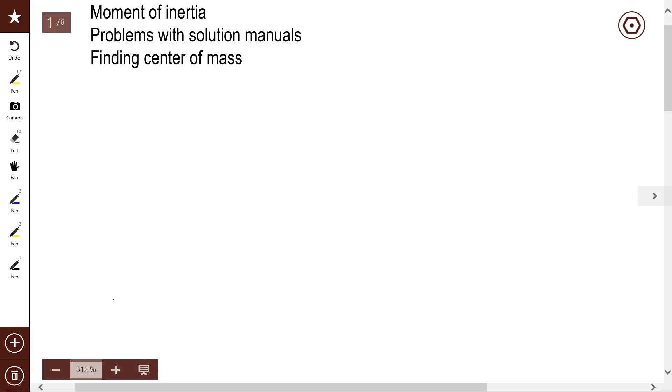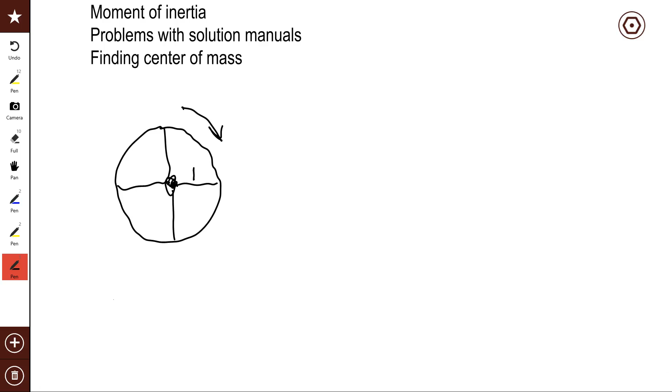If I were to take a ring of mass - let's say that's a piece of metal - and I bend it around, and I put some spokes in here, just so it'll stand up, and put a hub on there, and I spin it. This is a radius of, I don't know, 1 foot, 1 inch, whatever, and it's 10 pounds, let's say. Can you imagine that? Okay.

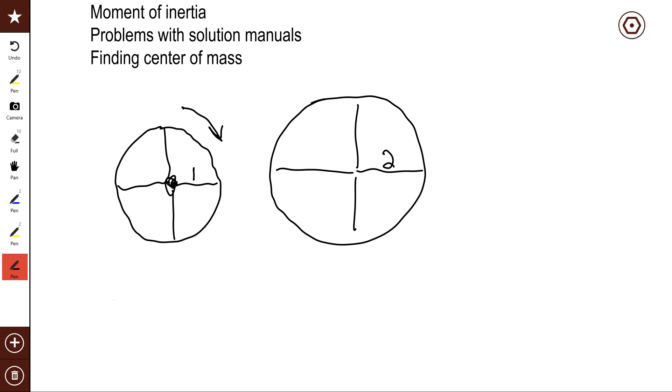And then what I do is I take another 10-pound ring, and I do the same thing with it, but this time I have a radius of 2. Does it have a hub? It has a hub just like the other one - I'm not trying to fool you, but good point. So it's got a hub, I'm doing the same thing to it. All right, and here's what I want to know - if you have your clickers, we'll see what you think.

Number 1 is the left guy, and number 2, or A or B, is the right-hand guy. What I want to know is which one of these would be harder to speed up in spinning. They're sitting at rest, and you're going to come up there with your hand and start turning them. Which one would be harder to get started, the little guy here or the big guy over there? It's the same weight, the same weight, just at a different distance.

Okay, so let's see what y'all are saying, if I can figure it out. Okay, so 65% are saying B. I was hoping for a bigger percentage, right?

Here's what's happening: the lighter, the shorter in this way that the mass is, the easier it is to turn. So if you got that one wrong, maybe I said it wrong, right? Maybe I've deceived you somehow. But if you're thinking 'wait a minute, that doesn't make any sense,' come see me after class, because I want to make sure you got the right idea.

Which one is easier? Well, you got a 10-pound ring, this big around, and I'm going to sit in the center and start turning it, making it go faster and faster. Then I have a 10-pound ring, but it's twice as big. Which one would be harder to speed up? The one that's twice as big. So if you got it wrong, maybe I just said it wrong. But what I want you to have is a feel for the fact that in order to get these things to start spinning, the distance that the mass is out makes a big difference. Make sense? You probably experienced it, right? The bigger the tire, the harder it is to get the thing moving.

The other thing that will give you a large inertia—inertia is it doesn't want to change, right—so what gives you a large moment of inertia is a large radius, which I just asked you about. The other thing is a large mass. So let's say you've got your arms out at a certain distance. If I pick up some weights out here and then try to turn like this, it's harder for my body to turn because of the extra weight that's out there at my hands. That make sense? So you have a feel for what moment of inertia is. Large moment of inertia means you got either big mass or mass at a large distance, one or both, right? You get the idea? So if you want lower inertia to turning, you want to pull the masses in. Does that make sense? Okay.

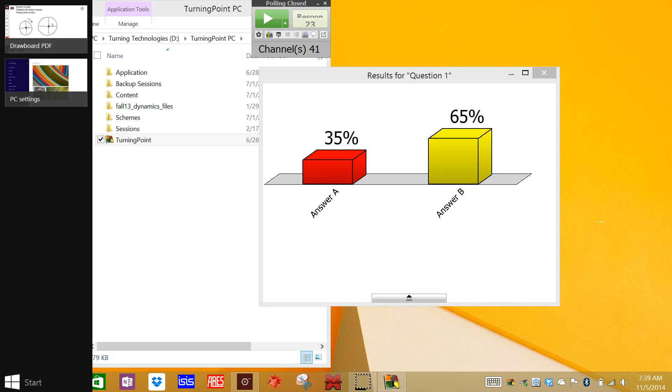The other thing that you need to know about moment of inertia that people are going to expect you to understand is something called the parallel axis theorem. If you have a body, any body, it's going to have a center of mass. Are you familiar with what the center of mass is? It's a balance point. Do you know how to calculate the balance point?

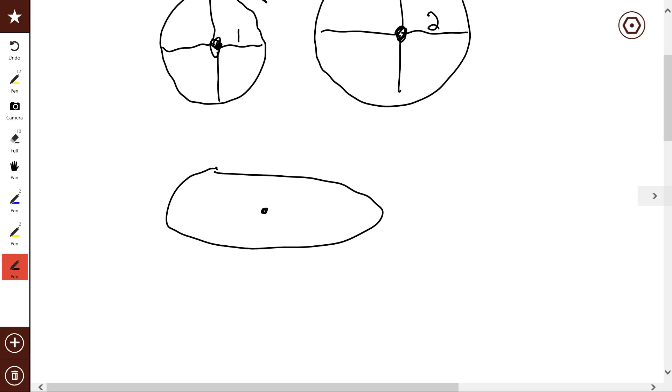It's the centroid. Well, it's close to the centroid, but if you take the centroid and multiply by density, then you get the center of mass. For example, if this is an area, the centroid would be the center of the area. So if you cut it out of cardboard and found the balance point of the cardboard, that'd be the centroid. If, on the other hand, this part over here was all gold, and over here it was all aluminum, it would have a different balance point, wouldn't it?

Center of mass is different than centroid, but they're very similar calculations. Got it? You know what the center of mass is. You could do it if you had to, I'm not going to put it on a quiz, but you could do it. The way you really do it in the real world is you draw it up in NX and click a button and it gives it to you. So I'm not going to beat you with it. But everything has a center of mass.

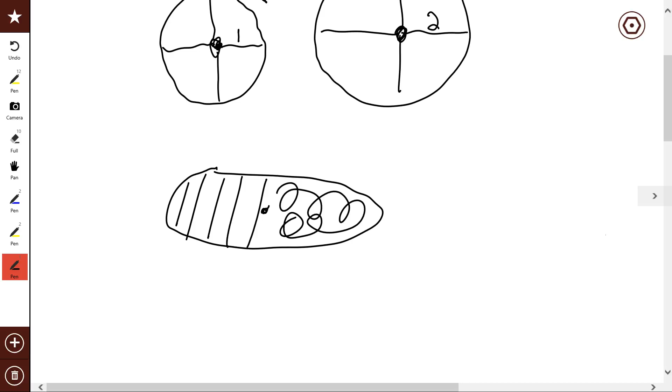Now, if you want the moment of inertia of something, say you have the moment of inertia about this point, about the center of mass, and you want the moment of inertia around some other point over here, then the moment of inertia around this other point is equal to the moment of inertia through the center of mass plus the mass times the distance squared between the two. Not on a quiz, but you better have that in your mind when you go to work, because somebody's going to say something and you'll say something stupid and lose your job because they'll say, what an idiot, doesn't even know how to take 2 plus 2. It's called the parallel axis theorem.

Usually they'll say, well, you can use the parallel axis theorem and shift it over, and you need to say, yeah, I understand, I know how to do it. Well, what you're going to do is you're going to do it on NX. That's the way you'll actually do it. But you need to know about the parallel axis theorem. People will ask you about that or say something about it, and you need to sound intelligent. Got it? You will use moments of inertia.

Especially in Chapter 17, you'll use them on the test. I will tell you the formulas for them. Y'all had Calculus 2, I'm sure, or are doing it now. In Calculus 2, they have you integrate to get the center of mass, or centroid, or whatever it is, and they have you integrate to get the moments of inertia. It's agonizing, isn't it? That stuff is the stuff I had to do. Man, we don't do that anymore. We just don't. So why are you taking Cal 2?

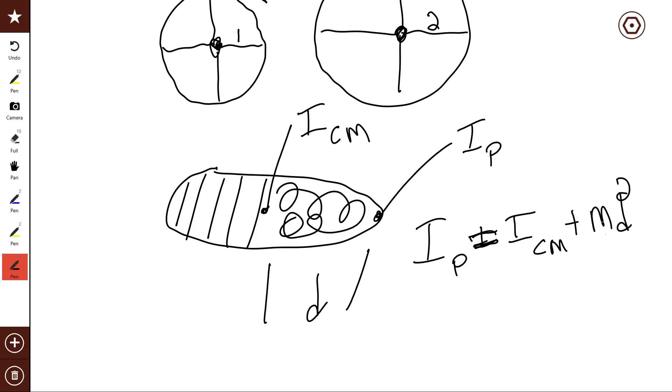Here's another issue, and I could care less if you use the solution manual. I really don't care. You're not supposed to, but I don't care. I'm not going to rat you out. I'm not going to come get you. I don't care, it's a learning tool. Use it. Here's the problem you're going to have.

In Chapter 17, the author does problems differently than what I do. I've done it his way, I've done it in classrooms when the professor made me do it, and I've done it in real life. I'm telling you, it does not work. Well, it works, it works, but it's confusing for almost all problems. Very simple little problems that I would make up in a book that I publish, you can use the technique the author's got.

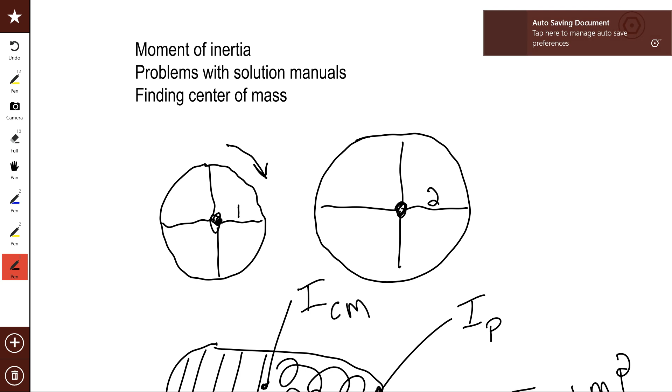It doesn't work for everything. Well, it's confusing—see how confused I am already? It's confusing to use that technique. What I'm going to do is like I've always done: I'm going to say there's one way to do it. Here's the one way you do it. It works every single time.

You can do what you want. So when you're doing your homework, if you got a copy of the solution manual and you open it up and say, man, this stuff doesn't look like anything Everett's doing, you're right, because I don't do it that way. If you want to do it that way on the test, that's fine, I'll grade it that way. But the odds are, and I've seen this historically because I've taught this class a long time, you're going to mess it up. You're going to try to use it, not listen to what I'm doing, do it your way, and make a mistake. And I'm going to hammer you, just like I'll hammer you if you make a mistake doing my way. It's up to you. So I'm just warning you ahead of time that the solution manual is not going to do it my way.

And I suggest you do it my way, but it's up to you. All right, so you know how to find center of mass. You have an intuition about moments of inertia, and I've warned you about the solution manual. How about we just do some problems?

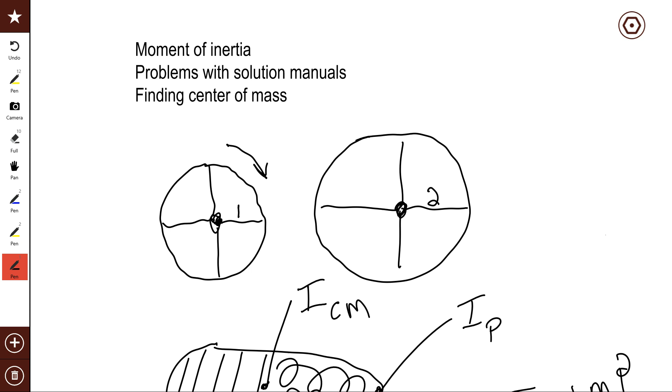Is that good? Okay. All right, so basically the difference in this particular, well, let me just ask you, let's read this problem and you tell me what the difference is. What's the difference between 16 and 17, okay?

So read this. The cart is given a constant acceleration of 6. Determine the force developed in the rod AC and the horizontal and vertical components at the pin B. The crate has a weight of 150 with a center of gravity at G, secured to the platform so it doesn't slide. Neglect the platform's weight. Okay, here's the picture.

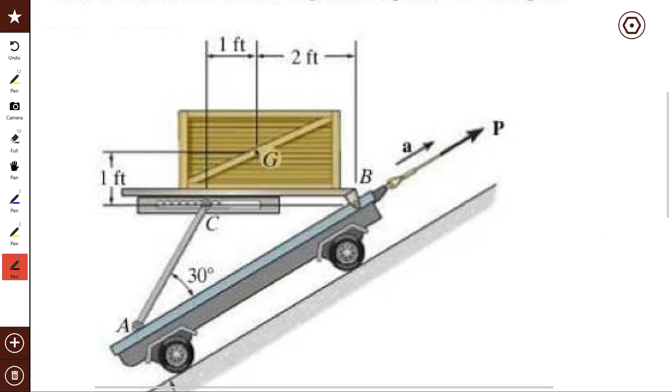Why isn't this a Chapter 16 problem? It wants a force, right? Remember chapter 12 and the difference between 12 and 13?

You count the degree of freedom. All right, so how many, by the way, how many degree of freedom is it? One, because the cart can go up the hill. Okay, stop the cart from going up the hill, nothing else changes.

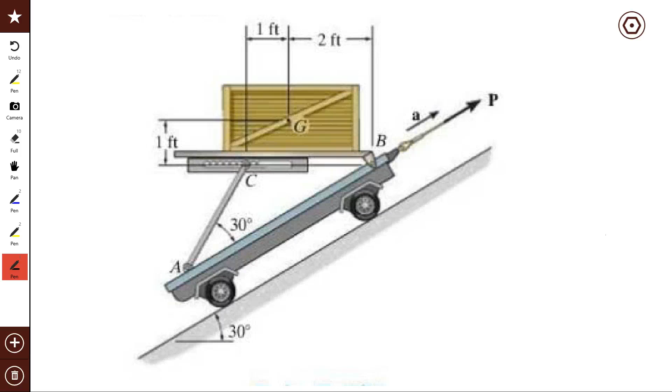Okay, what does 1 degree of freedom mean? It means if you give me one double dot, I can find all double dots. Did they give me a double dot? Sure, they told me the A was 6. So I go, hot dog, man, I can get all double dots. That's not what they want.

Right? So what do you do when you're faced with a situation like this? Because you're going to have to select between chapter 16 and 17 on the next test, right? Do I draw a free body? If you draw a free body for chapter 16, you're not getting any credit. It's not like I'm going to dock you, but you're wasting your time. It's not going to take you anywhere, and there's no credit there because you're doing the wrong thing, right?

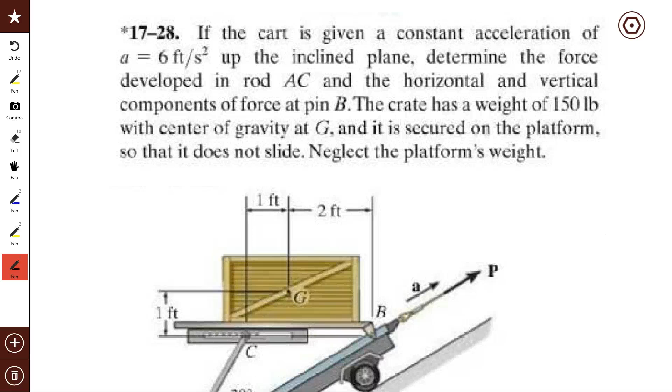So you need to be able to select them. So this one, pretty obvious, okay? All right. So how do you do a chapter 17 problem?

Free body diagram. Okay. So how many objects are there here? What are they? The crate and this body right here, right? Okay. So at most you're going to have 2 free body diagrams, at most, right?

Let's see. Shall we do it? Sure. Okay. Which one do you want to take the free body of first? The crate, and I hear the crate, I hear the cart. Here's what I want to do.

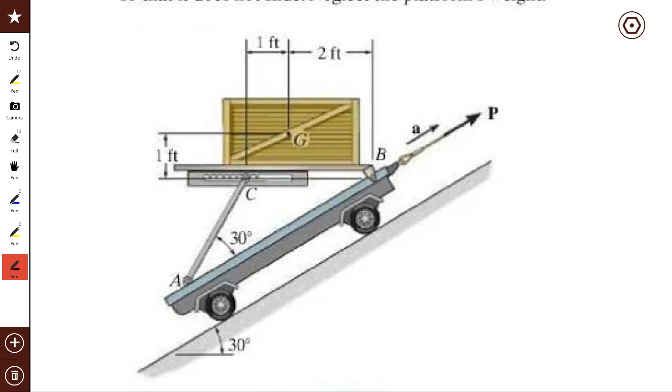When you look at what they want, the force at pin B, that's this guy right here, and they want the force in rod AC. See where that is right there? So here's what I'm going to do.

I'm going to go in there and I'm going to take a body like this. Okay, everything inside this circle is going to be inside my system. And I'm cutting through pin B. I'm going to try that one. Why do you think I'm going to do that?

Why did I cut it here at pin B? Because what I want is I want the forces at B to be between 2 things. They're always between 2 things. I want it to be between something that's inside and something that's outside. Otherwise, it won't come up in the free body. Make sense?

Really? Right? Okay, why am I cutting this? Because you want that one as well, right? You want the force in this guy. Now, why do I not cut it at the pin? Why can I cut it here?

For example, this would be dumb. See if I can get a different color. This would be dumb to come down here and cut like this. Why would that be dumb? First of all, it misses B.

Tell me about the forces when you start cutting into a big piece of chunky metal right there. You know what they are? Man, you got shear forces. Yeah, it sounds like you've been in Chess's class. You got shear forces, you've got tensions, you've got moments. Man, you got a lot of stuff in there. Do you know what they are?

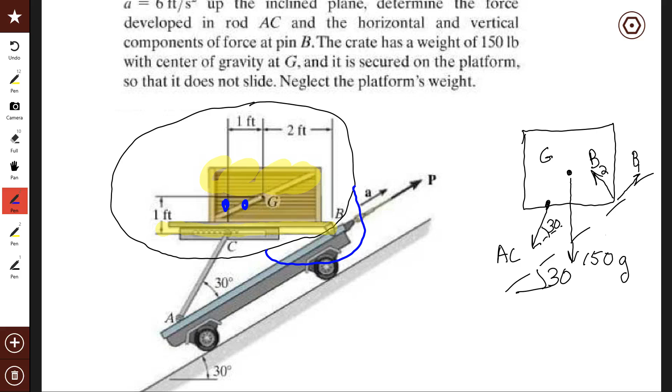It says it's 150 pounds. Is that weight or is that mass? Weight. So should I be taking 150 times G for the gravity? Oh, man.

There we go. What about those B forces? You like those the way they are? Why not? Why do you want X and Y?

Okay, I like that too, because what you're going to have to do, we're going to sum moments. You need to find the moment arm, the perpendicular distance. It's not impossible to find it, right? But do you want to do it? I sure as heck don't, right? So probably not smart, so let's change it, okay? And what would be convenient? Horizontal, vertical, that sounds good. Is that okay with you?

All right, so here's what we'll do then. I'll get rid of those guys. Haven't quite figured out. Oh, man. Too much. Oh golly. One of these days, man. There we go. Okay, I'm gonna put them in some other color, just because I don't want to try and erase them again. Okay, so here's a B. Whoops, pick it up. Oh man. Well, theoretically it works, huh?

Okay, all right, so I'm going to draw a B1 here, BX we'll call it, and then a BY. Okay, is that good? You like that one better? Okay, here's what we're going to do.

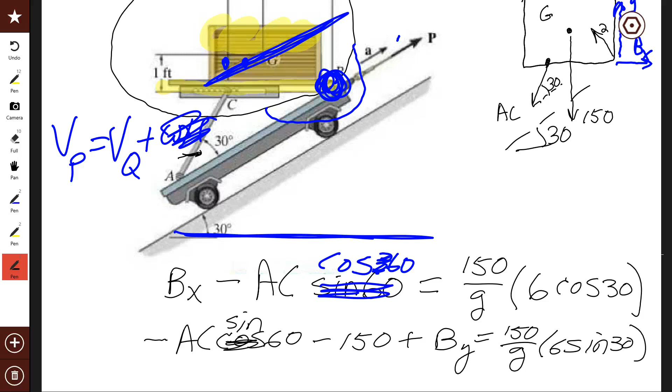You remember how to sum moments? It's R cross F, or the force times the perpendicular distance. Let me show you how I would do it up here.

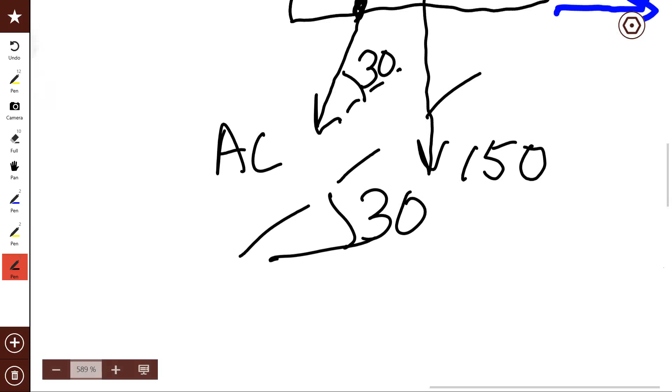Here's what I do: I'm going to find the moment of bx. I come in here and draw a line along bx. Then I find the center of mass, here it is, right there. And I want the distance between that point and the line I just drew.

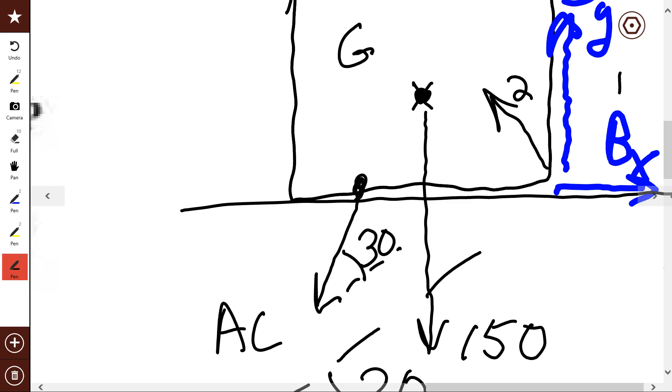What's the distance? Is it this distance here? That distance right there - that's the perpendicular distance from the force. A lot of times students say, oh, there's the force, and they find the distance from there to there. See that? That's not right - is that perpendicular? No, it is not. So what you do is extend the line as long as you need it to be, and then it becomes pretty clear what the perpendicular distance is. That distance is 1, I think, in the diagram.

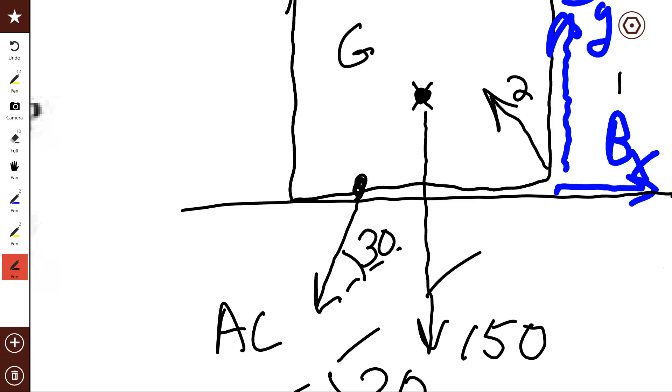So what's the moment of bx? It's bx times 1. Is it clockwise or counterclockwise? Counterclockwise. Why do we choose it as positive? That's the right-hand rule - i is that way, j is up, right-hand rule, positive rotation is out. So that's counterclockwise, that's the moment.

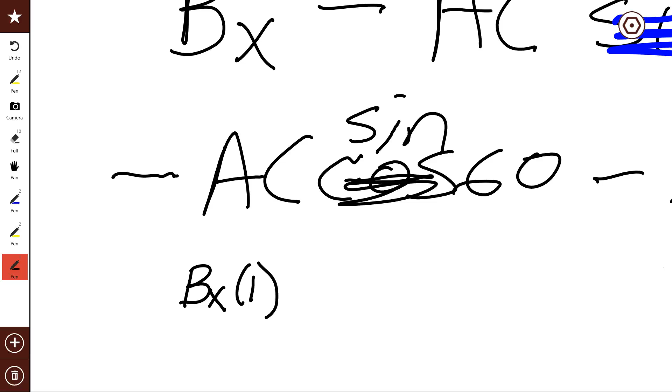Can you all see the direction, or should I talk about it? Think of it as being pinned down - hold it down gently with your fingers at G. If you pulled on bx, which way would it turn? It would turn that way, wouldn't it? So it's counterclockwise, that's going to be a plus.

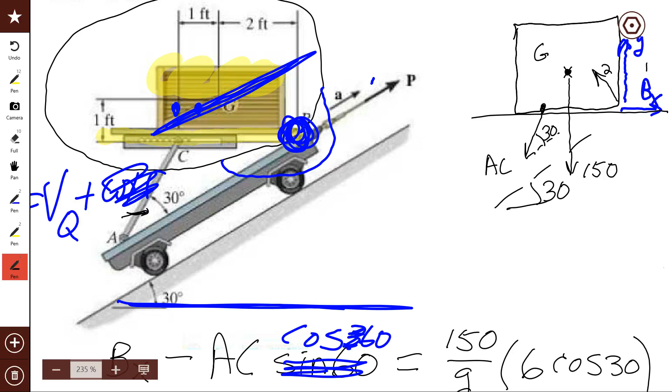Okay, get the by. What's the perpendicular distance for by? It's not the same. So it would be by times 2. What's the direction, plus or minus?

Okay, how about that AC? What are we going to do with it? What I would do is break it down into two pieces, a vertical and a horizontal, and then do that one. If you're really good at geometry, you can draw a line from here and find the perpendicular distance directly - I'm not good at geometry, so I'm going to break it into two pieces.

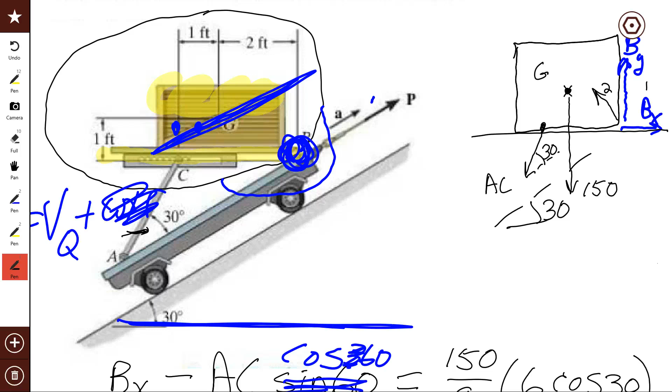So the vertical piece is AC cosine 60, right? Oh, I'm sorry, that's the horizontal - did it again, didn't I? Okay, so AC sine of 60, that's the vertical piece.

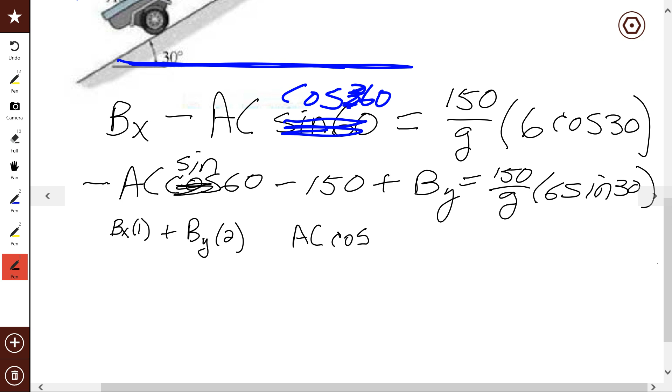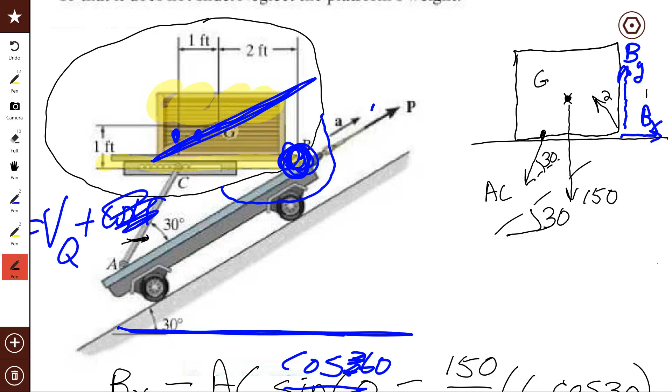Let's find the moment arm of that vertical piece. Here's the force right there - looks like 1 to me. And is it positive or negative? Positive? Okay, I agree.

Dadgummit. Okay. It's Monday, right?

Okay, the moment arm is still 1. What direction is it?

We're doing AC, the horizontal, right? According to my diagram, which way is the horizontal AC? Well, you have your diagram the wrong way. I wanted it for compression. No, this is tension, I drew it in tension. Isn't it that way? Yes. Okay, if it's that way, hold it down gently there and pull here.

Which way does it go? Clockwise, negative direction. Yeah or no, argue with me. I'm not saying I'm always right. Apparently today I'm always wrong. On mine I just switched to it. Well, because you have yours in compression, you're going to have just the opposite of what I have, and your number will be opposite mine. So if I get a negative, you'll get a positive, because it is in compression, right?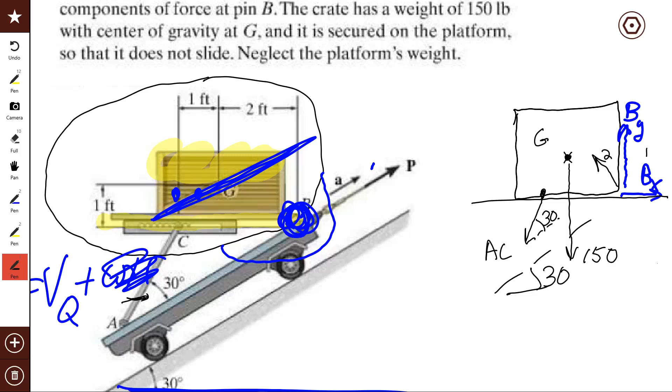All right, so the moment arm is still 1, but I screwed up on this guy. This should be a negative. Okay, now the vertical, right? Now we'll get the vertical. That'll be AC sine of 60, and the moment arm there is 1.

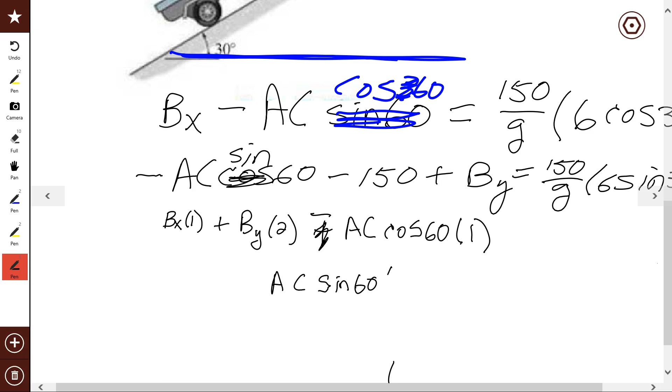In what direction? Anybody else creating moments? I got the BX, I got the BY, I got the AC. What about that 150? Ah, good.

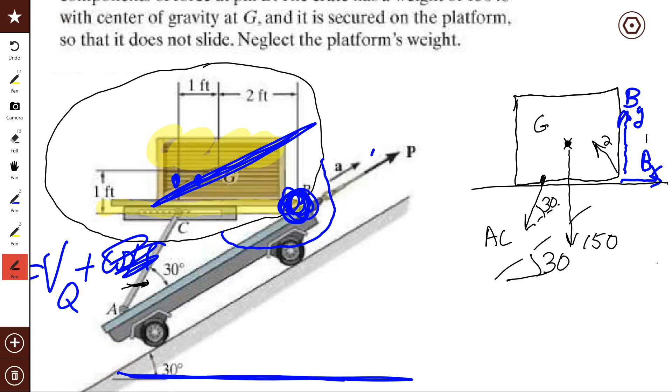Okay, so what is this equal to? Well, according to Newton, brilliant man that he was, this is equal to the moment of inertia of what? Of the crate, of the thing in the free body. Whatever you chose in the free body, if you put 2 masses in the free body, it's the I of both of them. If you have 1 mass in the free body, it's the I, the moment of inertia of that body. Got it? Whatever's in the free body. I, around what point? The same point you're summing moments around. So if you sum moments around B, the wrong thing to do, but if you did, it would be I around B. Where did we sum them? Center of mass. So this would be moment of inertia, usually called I around the center of mass, which was point G.

Times the angular acceleration of the body. So it's like MA, it's I, that's your mass, and your alpha is your acceleration. So it's I times alpha. Why did I put it in as a positive alpha? What am I assuming about alpha? Which way is positive? I'm assuming it's accelerating counterclockwise. Do you know what the alpha is?

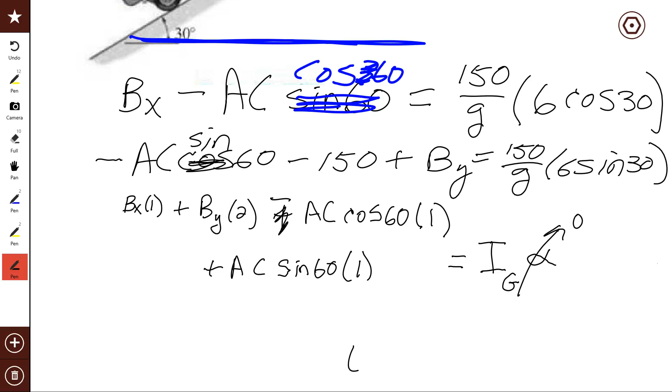Now, how many unknowns do you have? Bx, By, AC. How many equations you got? Problem solved. Can you solve 3 equations for 3 unknowns? Yes, you can. Do you want me to spend time doing it? No. Okay, let's go to the next one. But you can do it, right? Are you saying no? Okay.

How did that one get in there? Oh, it's the second one. Yeah, I remember now, that's what happens when you prepare things. It's like, what? Okay, let's see if this one's any different.

The strut AC can withstand a maximum compression of 150 before it fails. Determine the cart's maximum permissible acceleration. The crate has a weight of 150, center of gravity G, blah blah blah. Okay, what's different about this one?

How do you know it's a chapter 17? It's 1 degree of freedom, and they're asking you for an acceleration. Isn't that chapter 16? Okay, what's the degree of freedom? 1. All right, that means if you give me a double dot, I can find all double dots. Did they give me a double dot? That's why it's a 17. See that? That's why it's a 17. I could have done the same thing with this problem over here.

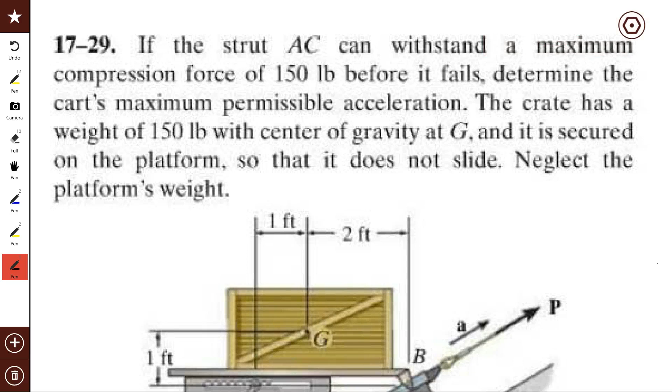Let me change this problem over here. Here's what I'll do on a test: if the cart is given a constant acceleration of 6, blah blah blah, and the force in the rod can withstand 500 pounds, what's the acceleration of G?

If the cart is given a constant acceleration of 6 up the ramp, and AC can withstand 500 pounds, what's the acceleration of G? Do you need a free body for that? Unless you're worried that the thing's going to bend and break or fall apart, then you draw a free body diagram because you want to know what's the force in AC to make sure it's less than 500.

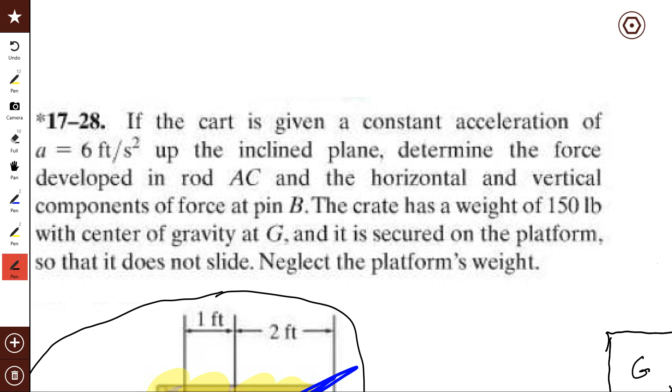But see, I can change the words just very slightly, and I think I can fool you into doing the wrong thing. Don't let me fool you. Got it? And you say, oh, you're just mean. No, I'm not mean. I'm trying to get you ready to be an engineer.

So why is this one different? If I were to say, if the strut AC can withstand blah, blah, blah, and A is given an acceleration of 6, what's the acceleration of G? Do you need a free body diagram to do that? See what I'm saying?

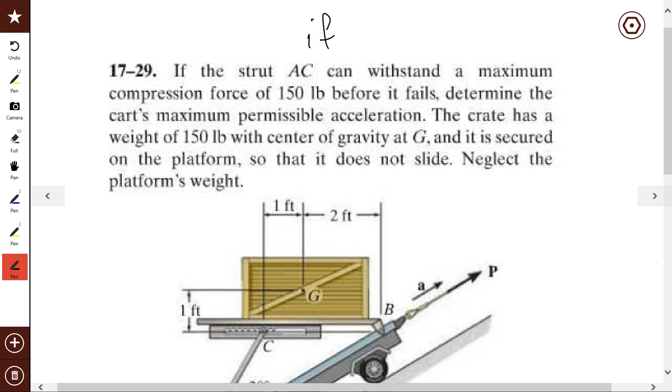If the acceleration of B equals 6 up the incline, what is the acceleration of G? Unless you're worried about the strut breaking, the answer is 6. You see that?

I hope you can begin to tease this out. This is a 16, this is a 17. This is free body, this is no free body. Yes or no? No? Okay, come see me in the office. You're staring at me like I'm an idiot, and I know I'm an idiot, but don't stare at me.

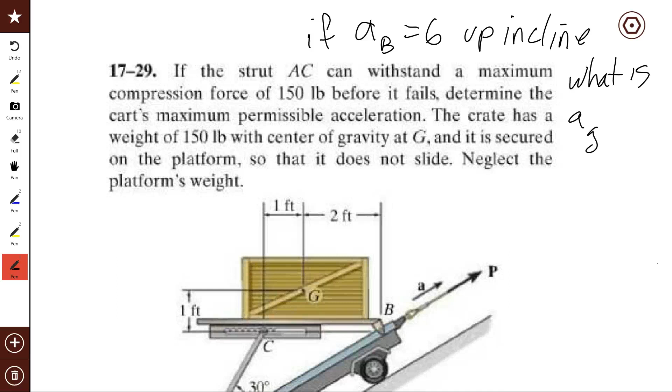Is this problem really much different than this one? You're going to do a free body. What's the free body of? Of the box, right? You're going to sum forces, you're going to sum moments. What's different here from before?

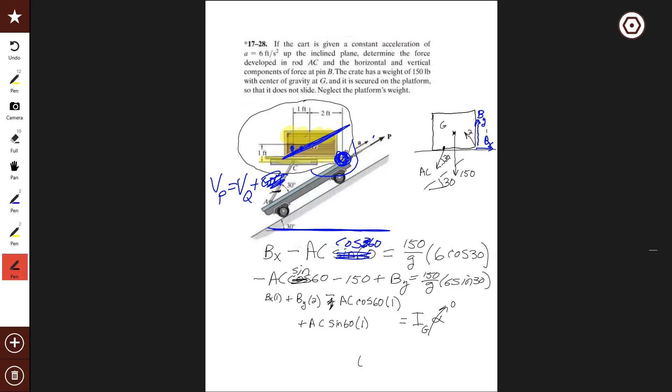Let's see if I get my highlighter. Over here, we knew this was 6. Now it's A. Over here, we were solving for AC. What is it now? 150 or whatever it was -- the load that it could handle. And you know it's compression, they said it was compression, right? So for this guy, this would be plus 150 or whatever the number was.

Is the problem any different? Do you really want to do it? No, it's the same thing. The equations are going to be the same thing. The procedure's the same thing. It's just a different unknown.

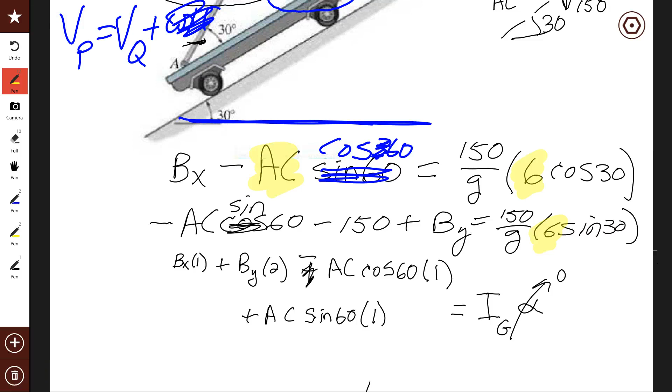How about this one? Trailer with its load has a mass of 150 kilograms and a center of gravity, blah, blah, blah, subjected to a horizontal force of P. Oh, by the way, I say center of gravity a lot, and the book says center of mass. They're not exactly the same.

The only way they would be different is if the G changes. How would that happen? If you're building a huge structure, something like the space station, it's pretty big, and you're flying it so that part of it is in one G and the G down here is different than the G up here -- the center of mass won't be the same as the center of gravity. But maybe you'll be a rocket scientist, I don't know.

But it's the center of mass, I get sloppy. It's the center of mass that you need, not the center of gravity. Just like the centroid is different than center of mass if that has a different property, like half aluminum and half steel. Then the center of mass will be different than the centroid.

Trailer with a mass of blah, blah, blah, center G, horizontal force at P, determine the trailer's acceleration, normal force on the pair of wheels at A and B. How do you do this? Free body diagram, very good. It's always the same. I'm really, you should be getting bored, you should be yawning.

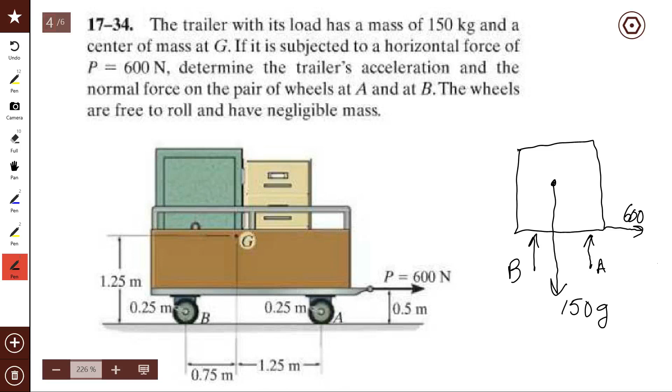Oh, which way you want? Oh, I'm sorry. Did I do it right? Hope so. I hope I'm doing something right.

How come you have an A and a B? Exactly, why do they go in there? Because what is in the free body is the wheels and the cart, all that stuff, nothing else. So A is the normal force between the tire and the floor - floor's outside, the tire's inside. B is the same reason.

Okay, 600. Somebody's got their hand on there pulling it. They have to - they didn't show it to me, but the forces just don't magically appear. They've got to be between something. Okay, now what?

Sum forces. In what direction? Tangent normal? R theta? X and Y? How come? What made you make that decision? Because all the measurements are - no, that's not why. Because the acceleration, right? Forget the measurements. You can get measurements, those are easy. What's hard in real life is finding the accelerations.

That's what's hard. So you should practice saying, well, where's the acceleration? What is the acceleration? What's it going to do? Of what point? The center of mass. Okay, so think about the center of mass. What is the center of mass doing? Horizontally? Okay, so that looks to me like an ideal I and J sort of thing.

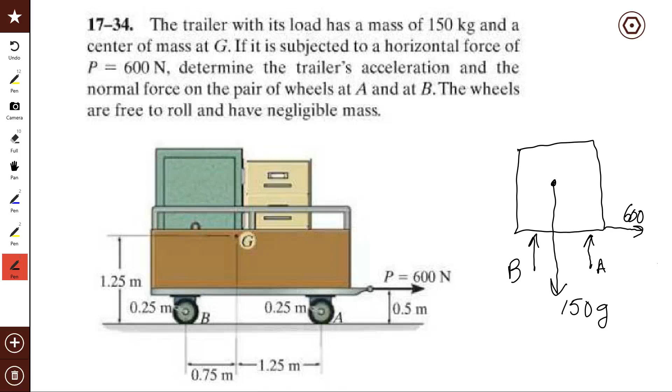So we're going to sum forces in I and J. And thank goodness the dimensions work out too - but that's not why I made the decision. Okay, sum forces in the X.

Did y'all get that one? How about Y? Did you get that? Why is it zero?

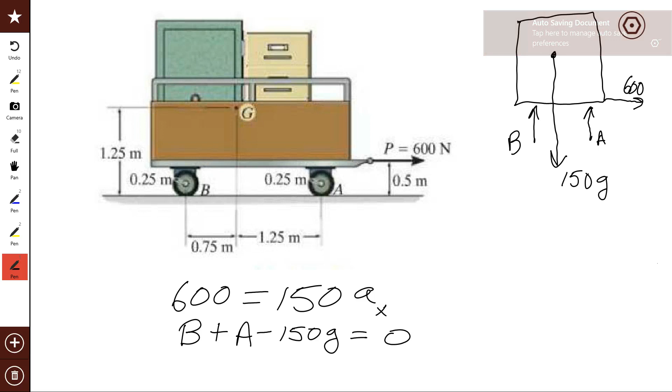Because it's going horizontally. So write the position - position is equal to a constant plus x. Take a derivative, derivative of a constant is 0. So everything in the vertical is going 0. It's very common for students in dynamics to say something's got to be 0, and you start throwing zeros in for accelerations. Don't do that. It is rare that you'll have that, I mean it happens, but make sure you know why you're putting a 0 in there. Don't just arbitrarily throw one in.

And a lot of times you think, oh, well, the normal forces are always equal to 0. No, they're not. If you like, I'll give you an example. Okay, now what are you going to do?

Moments. Okay, around - how about, it'd be nice if I did them around A. What do you think? Why? Because I said not to, right? You can read the book, and the book will show you, oh yeah, you can put in these correction terms. You're on your own if you want to do it.

Okay, I'm going to sum them around the center of mass. Why? Because I can't find a point that has 0 acceleration, so center of mass is always a good choice. So I'm going to sum moments around G. All right, so I'm going to get 600. And which way is positive? Counterclockwise. I is that way, J is up. Right-hand rule, counterclockwise is going to be positive.

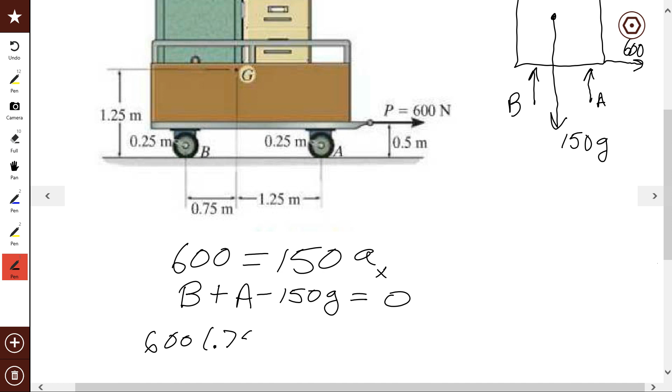Okay, so here we go. I've got a 600, what's the moment arm? 0.75, I think you're right. And positive or negative? Everybody agree it's positive?

Imagine that you're holding it gently at G and you pull on it with P. You're going to turn it this way, like that. That's positive. Okay, how about A?

I have an A. What's its moment arm? Looks like 1.25. Positive or negative? Positive. How about B? B, moment arm of 0.75. Negative. That equals moment of inertia.

Around what point? Times alpha. Which way do I assume the alpha is going? Positive, because I put it in as plus alpha, I alpha, so I'm assuming it's positive. It's counterclockwise. If I solve for alpha and I get a positive number, I'm right. Get a negative number, I'm wrong.

What is alpha in this case? How do you know it's 0? Because there is no angular velocity. How do you know? Paint a line right here, there's a line on the cart, here's a line on the floor. Do those angles ever change? Okay, so it has 0 angular velocity. Does it ever? No, never. Okay, then it has 0 alpha. So this guy here is 0.

The next section, they're not 0. Okay, so how many unknowns do you have? AX, capital A, capital B. How many equations you got? 3. Can you solve it? Do you want me to do it?

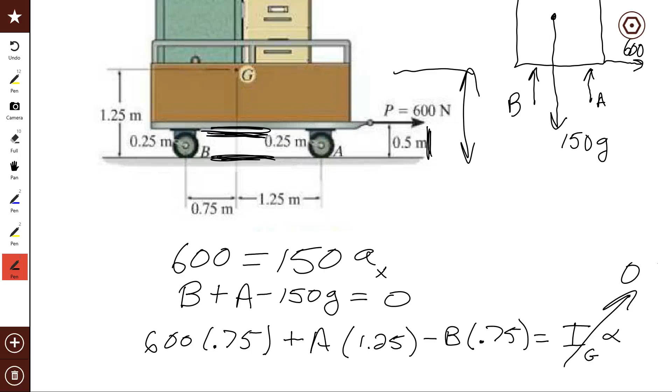Summing moments? Yeah. Then what you're going to do is look back at the free body diagram. You're going to take the perpendicular distance from each of the forces. So, for example, the way I do it, because I get confused all the time, I get a different color and do this. I say, okay, here's the force A. I'm looking at A, so I draw a line right along A. Now you want the perpendicular distance, that distance right there. That's what you're asking me, right?

Okay, and then for B, I say, okay, I'm going to draw a line along B, and then I'm going to find the perpendicular distance. It's always been that way. If you say, that's not what they taught me, yeah, they did, but it's always like that. And then how about the 600? Okay, I'm going to draw a line along the 600, and then I'm going to find the perpendicular distance.

Okay? And R cross F works if it's like in 3D and you got weird positions. It's easier to take the R from, 3 feet this way, 2 feet that way, and 6 feet up, and then cross it with the F. But for textbook problems, perpendicular distance is usually the easiest.

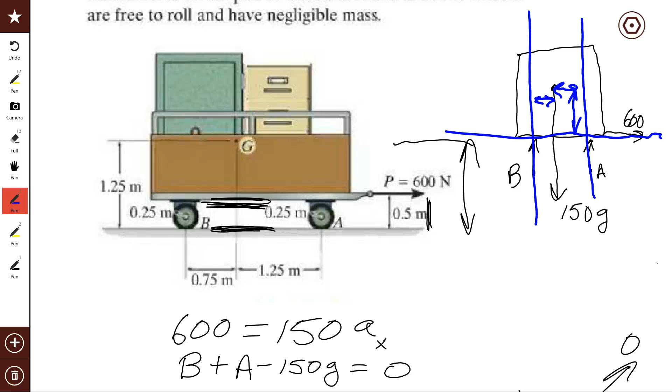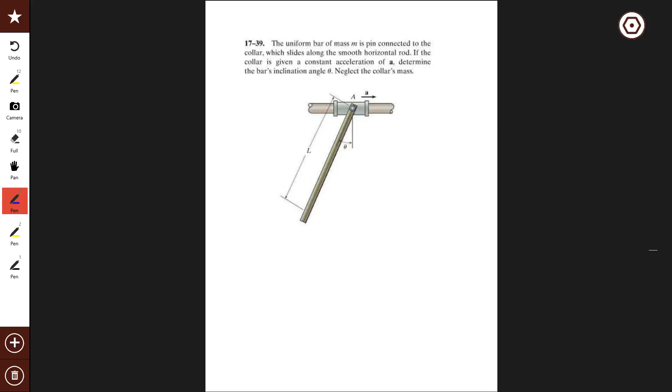Okay, any questions? Any other questions? Not quite sure how we're doing on time. Oh, okay. Let me slip in something, if you don't mind. This will get you ready, I think. Well, I think it's important.

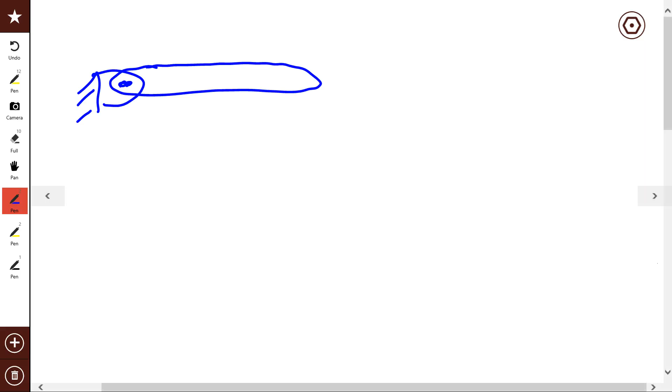Okay, here we go. What if I had something like this? Let's say I had a rod, and I pin it down right here. So basically it's going to go like this and whew, fall. Okay? And I'll tell you the mass, I'll tell you the length, I'll tell you the center of mass is right here smack in the center. I'll tell you all of those things, right? How big it is and everything else. All the things you want to know.

Here's what I'd like to do. I'm going to release it from rest. I'm going to hold it out there and then I'm going to let it go. I'm holding it with my hand, then I'm going to let go, and it's going to fall. What is the angular acceleration right when I let go?

Okay, good guess. Anybody else want to guess, or you want to figure it out? I warned you, right? Be careful, because you're going to say, oh, this has got to be 0. Okay, well, if alpha were 0, it has no acceleration. If it has no acceleration, acceleration is the change, angular acceleration. Angular acceleration is the change in angular velocity, correct? So you're telling me it has no change in angular velocity, correct?

So what's its angular velocity when I let go? Nothing, it doesn't change. Have you ever seen them go like that? Magicians do that, right? Ooh, come on, they're fooling you. Does it stay like that? No. Can the angular acceleration be 0? No. Be careful, I warned you, right? You're going to say, oh, it's got to be. Well, no, it isn't. How are you going to figure it out?

Is this a chapter 16 or chapter 17? You're staring at me like I'm speaking Greek. It's not Greek, it may not be English, but it isn't Greek. So let's figure it out. Is it chapter 16 or 17? How do you know?

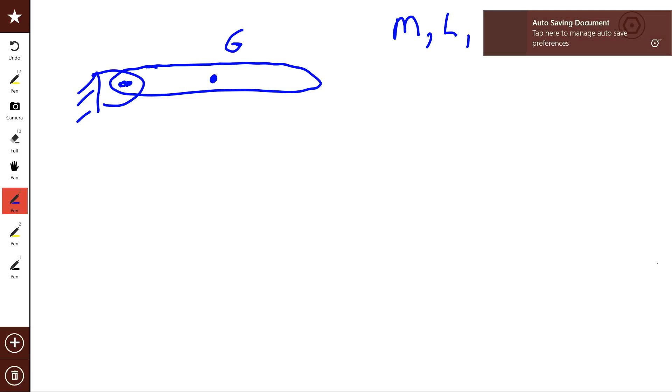You thought I did. Gravity is not a double dot, right? It's a force. It's not a double dot. So what are you going to do? Free body diagram. Let's do a free body diagram of this.

You see how they all start? At least half of you are going, I haven't a clue what you're talking about. Count the degree of freedom. If you don't know what to do, I've faced it. People come in, people with money, and you don't want to look stupid in front of people with money because they may give you some.

They'll come in and ask me something and I haven't a clue what this person's talking about. So what do you think I do? I count the degree of freedom. I start thinking about it the same way I've always thought about all problems until all of a sudden it kind of snaps in there. Oh, okay, the answer's 43. And then I look really brilliant, and they give me some money.

You know, so you're confused, you say man I haven't a clue what you're talking about. Okay, count the degree of freedom. Is it chapter 16 or 17? Do I need a free body diagram? Yes, you do. Draw it. Okay, here we go, I'm going to simplify it a little bit.

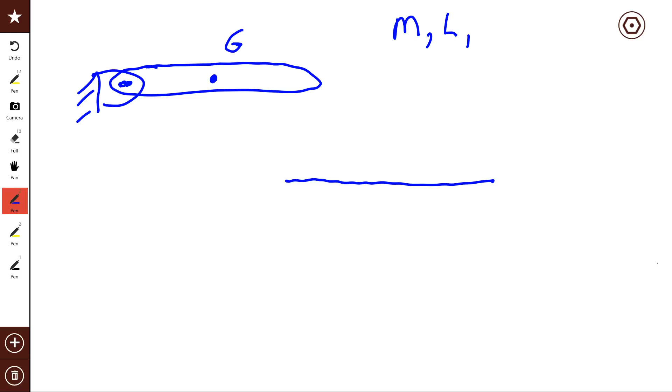There's the body. What kind of forces do you have back here at the pin? It's a pin, right? Could be vertical and horizontal for all I know. And a moment? Well it's a hinge, right? So can it hold me up? No, so it's going to fall. So is there a moment back there? Okay, so I have a point, let's call that point A.

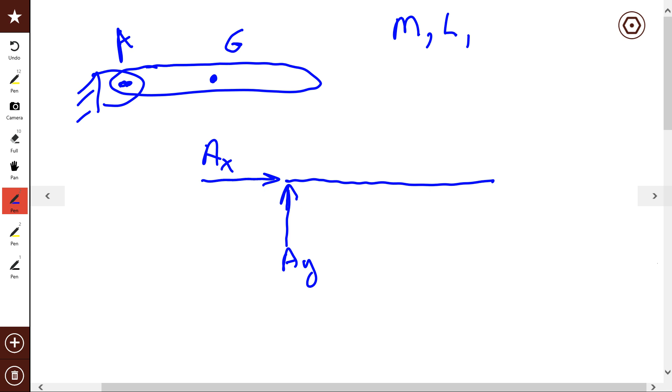So I could have an AX, or an AY excuse me. Which way am I thinking it goes? Up? Okay, I have no idea what it does. Here's an AX. If I solve for them and I get positives, then I'm right. If I get negatives, I'm wrong.

Where other forces? You got any other forces on there? Center of gravity, and what do you got there? Weight, mg, right? It's not an acceleration of gravity that it has, it has a force of gravity. That's what it's got.

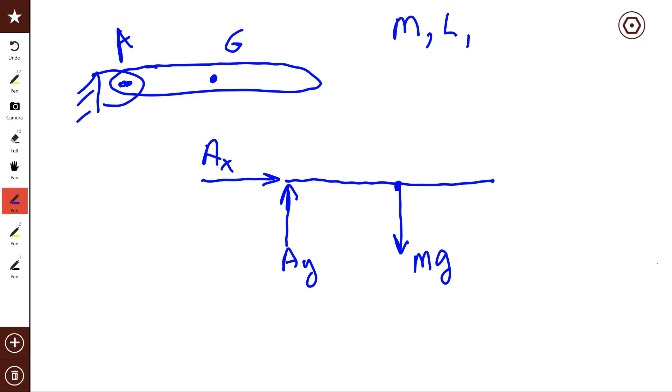Okay, anything else? What are you going to do? Some forces? Okay, in what directions? Is it going to be X and Y? That's fine, we'll do X and Y. And why are you saying X and Y? Because the forces are all X and Y? Oh no, we're not doing that. What are you going to use?

How are you going to find the acceleration? Let's think about that. Are you going to use a loop? Tangent normal? Special points? You're going to use special points? I'm going to use special points.

Now if you say no, I'm going to use tangent normal, if you can visualize it and say man I'm going to use tangent normal, okay well that's fine, I won't get mad at you. You say look, that's fine, but you got to think it through and say what is it you're going to do for the acceleration. I'm going to use special points. That always ends up in I's and J's, because I'm going to do cross products and all that kind of mess. So I'm going to pick I and J. That's why, not because the forces are lined up, but because of the accelerations.

Okay, so let's sum forces in the horizontal. AX equals mass times the acceleration of point G, this is point G in the X. Sum forces vertically. AY minus mg equals mass times acceleration of g vertically. Now, which way did I assume AGY was?

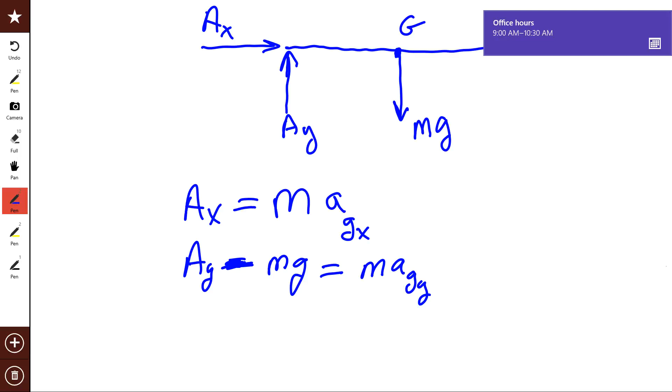So if I get a positive here, what do you think I'm going to do? I'm going to say, ooh, I made a mistake. Right? Because anybody knows it ain't going up. Or is it? You could be doing a really complicated problem, you say I know it's going to the right, and all of a sudden it goes, no, it's going left. And you go, huh, what? And then, oh, that's right.

Yeah, this is, okay, so it doesn't mean that you made a mistake. It just means either your logic's not right or whatever. But yeah, in this case, it's so simple. If I get a positive number on that, I'm going to go back and look for the mistake I made. Okay, all right, now what?

What do we do? I've done 2 already. Moments, about where? G? Is that really where you want to do it? Why? Can you do it around A? That's the first question.

What does it have to have? No acceleration. Does this, what kind of, it's a special point, right? Isn't it in permanent contact with the ground? Then tell me about the acceleration. Same as the ground. Does the ground have acceleration? No? Okay, then can I sum around A? Is that smart? Yeah, because like in statics, man, you got 2 of them, they disappear. Okay, let's do it around A.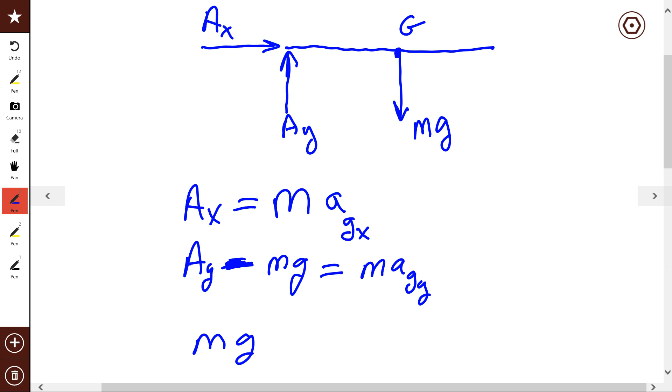Okay, so I have mg. Let's say this is a length L. So G is right smack in the middle. It's a nice uniform rod. MGL. Y'all agree? Positive or negative moment? It's going clockwise, correct? Right? I is that way, J is that way.

Positive is counterclockwise, so it's going to be a negative. Anybody else have moments? Okay, and this equals 0, right? No, this is equal to moment of inertia around what point? A. Times what? Alpha. Which way am I assuming alpha goes?